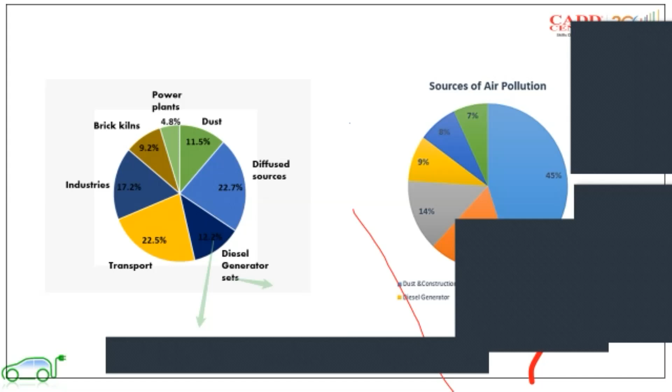Now, if I consider three things: the transport sector. First thing is pollution. What is the second thing? Second thing, most important, is consumption of oil. Global consumption of oil, if I consider it globally, it's huge.

If we consider these kinds of things, transport is providing more than 50% utilization, meaning oil consumption is too much. If we are able to reduce that 50% to, let's say, 10% at least, there will be a huge impact on global oil consumption. And everyone knows oil is not something that will last for your lifetime, there are some limitations to it.

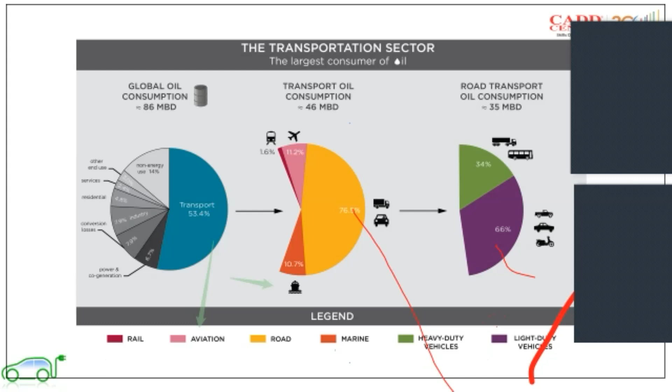What we are going to learn in this webinar is something related to electric vehicles. Everyone here is an electrical engineer or mechanical engineer. We are all going to learn these things and implement them to reduce pollution, and to reduce worldwide oil consumption.

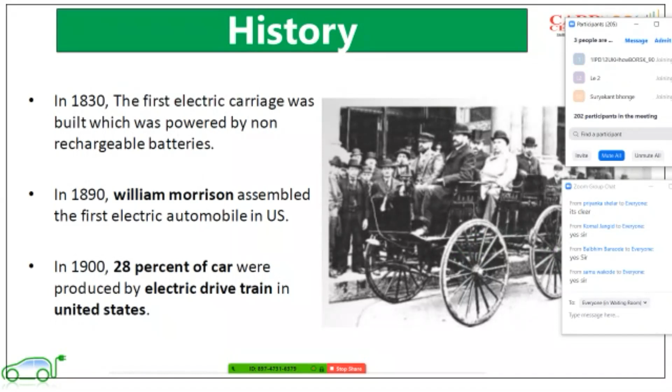Now let's move towards the history. So it's not a new concept - electric vehicle started in the 1830s, but it couldn't progress further because of only one reason: those vehicles were powered by non-rechargeable batteries, and everyone knows that a non-rechargeable battery is not going to work for long. If I want to go, let's say, 100 kilometers, and that battery is capable of providing me 100 kilometers range, then after that there is no option, because that battery is non-rechargeable.

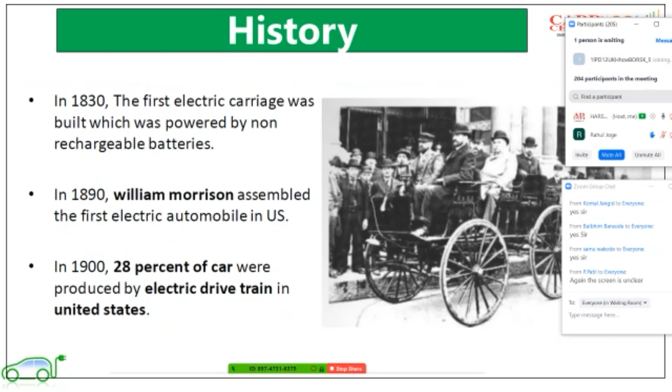That is the only reason despite starting in the 1830s, it hasn't reached here yet. Now in 1900, 28% of the cars were already converted into electric drivetrain in the US. All normal vehicles were converted into electric vehicles in 1900, that's 28% of cars, a huge number. But because of some reasons, which we'll discuss further, all these things couldn't continue.

There is one reason that it's not a new concept, and the 100 kilometer per hour speed record was already achieved with the help of an electric vehicle in 1899. From this you can get an idea that it's not a new concept, it's a very old concept.

But right now we are working on all these things because of only one reason: we know the future of electric vehicles. Therefore we are investing our time and money in learning about electric vehicles.

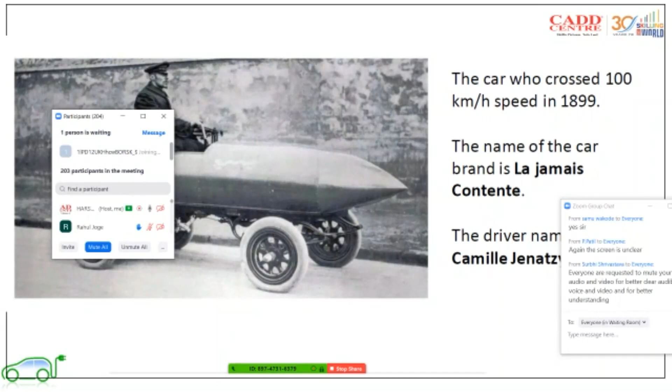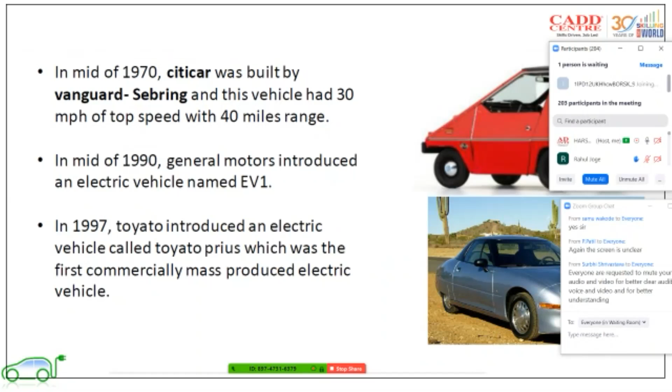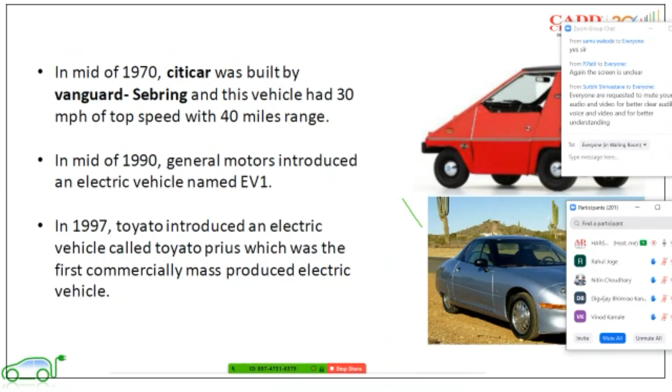And after that, the most important one, the Toyota Prius. It's still working right now, and Toyota Prius is one of the brands we are going to learn about in the future. It was introduced to the world in 1997.

Okay, now it's okay, I don't think so right now. Is there any issue with my screen?

Okay, so after that, the most important thing that changed the viewpoint of electric vehicles is Tesla, the Tesla Roadster. The mindset of every person related to electric vehicles changed because of only one reason, the Tesla Roadster in 2008. Elon Musk's Tesla introduced that electric vehicle, their first electric vehicle in 2008, the Tesla Roadster.

The history behind this car is very different. They started with a certain budget, let's say 50 rupees, but they ended up making that vehicle for 100 rupees. If I consider that simple example, it means they spent double the money. If their budget was 1 lakh rupees, they spent 2 lakh rupees. But after that, they worked on their battery, they worked on the overall design of the electric vehicle.

And right now, we can say one of the greatest names in electric vehicles is... okay, just give me a second, I think there is some disturbance. Sorry, just give me a second.

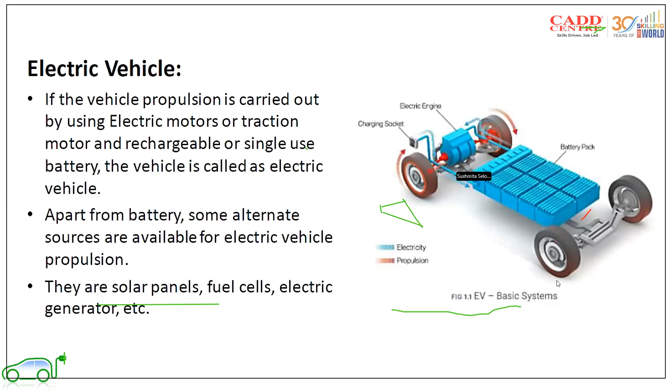Okay, so now let's start. So we have seen the history. So what is meant by electric vehicle? Everyone knows one thing: if I'm considering a normal IC engine or petrol vehicle, what are the main components of that vehicle? If I consider a petrol vehicle, to drive it we need one thing, that is the IC engine, and that IC engine propels the overall vehicle.

So here you can see, there is one IC engine, there will be a fuel tank, and the propulsion system happens only because of the IC engine. If I replace that IC engine with a motor, this is the EV structure.

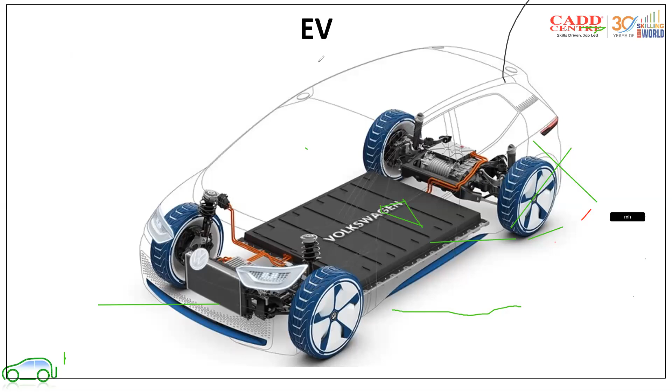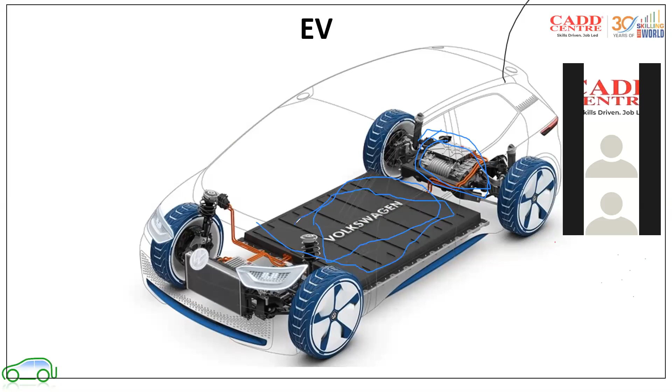Now see, this is the battery, this is the battery pack. We will learn how to develop an electric vehicle or battery after these 6 days of webinar. This kind of battery we are going to use, and how to develop it we will learn. Don't worry about that. I can guarantee one thing: the space requirement for the electric vehicle—if we consider the front area, it's totally empty because of only one reason. We don't require the IC engine. We are using a motor, and the motor is already fitted over here. So that is one of the biggest advantages.

Now, why is electric vehicle needed? What are the advantages of electric vehicle? Everyone has some idea why we are using electric vehicle. There are so many advantages, so we will do a brief comparison between a normal IC engine vehicle, meaning petrol vehicle, and electric vehicle.

As you can see, there are 4 to 5 differences between electric vehicle and IC engine. If we consider a gasoline or petrol vehicle, there will be greenhouse gases, and there will be no pollution in the electric vehicle.

Second thing is range. Range is one of the things which is lacking in the electric vehicle. But how much exactly is the range of any electric vehicle? What factors do we need to consider when calculating the range of an electric vehicle, or the time required to charge it? Can anyone guess how much time it requires to charge an electric vehicle? We will learn this topic day after tomorrow, but right now tell me, how many of you have an idea how much time it takes?

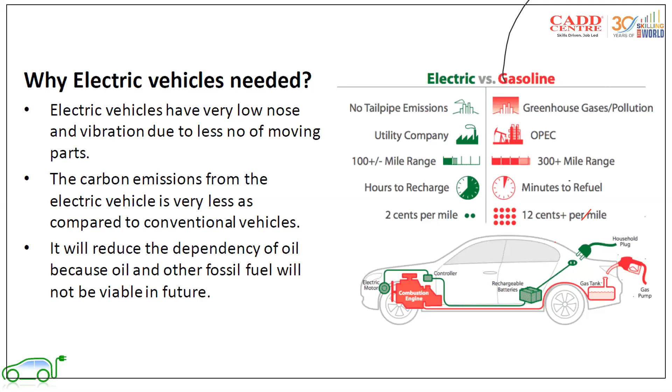Now let's move to the next point. If we see the benefits of electric vehicle, we are just focusing on the positive side. What are the things which are going to help you build that electric vehicle? Why are we focusing on electric vehicle? First thing: it's very energy efficient. If I am using a battery, the output I get will be very good. Second thing: there will be no carbon emission, almost negligible, because we are using pure batteries. Third thing: fuel cost is comparatively very less, and I am going to do calculations—I will share a comparison between Mahindra E2O and a normal petrol vehicle.

You will see the drive comparison—let's say you are going to travel 10 kilometers or 20 kilometers. If you compare the cost of an electric vehicle and a petrol vehicle, both will be very different. We will discuss all of this. Now, the drive system is very simple. We will learn about the propulsion system, and you will be very sure why I say the driving system is simpler. So these are some of the benefits.

Regenerative braking is not practically possible in a normal vehicle—well, it is possible, but we need to add many additional circuits to make it happen. That's why we focus on electric vehicles. Now, what are the challenges of electric vehicle? Definitely there are many challenges we face. The most important is the time required to charge. How much exactly—that will vary, but definitely it requires more time to charge the electric vehicle.

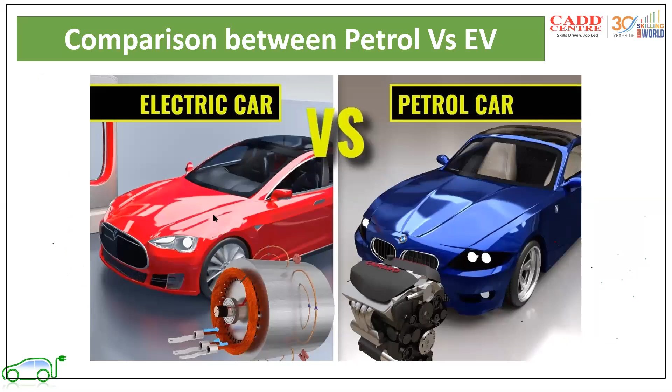Now let's see the exact comparison between petrol vehicle and electric vehicle. What are the key points we need to consider when comparing an electric vehicle and a petrol vehicle? The first important comparison is what is required to propel the system. If I talk about a petrol vehicle, we need an IC engine which is driven by petrol as fuel. And if I consider an electric car, we will require an electric motor. In the IC engine there will be more than 200 moving parts.

200 moving parts. And if I consider a normal electric vehicle, there are less than half as many moving parts available in electric cars. The motors we use will be very easy to construct - first thing, very easy to use. Second thing, third is due to fewer mechanical or moving parts, there will be less losses. If losses are less, then definitely at the end I will get more efficiency. If I consider a petrol vehicle, definitely there will be more losses. This is the first comparison.

Now the second comparison is no pollution. We have already learned the impact of air pollution or oil consumption on the environment. For that reason alone we have chosen electric vehicles. Therefore, there is no pollution from electric vehicles, while petrol vehicles contribute more to pollution. When we use a petrol vehicle, definitely there will be more pollution.

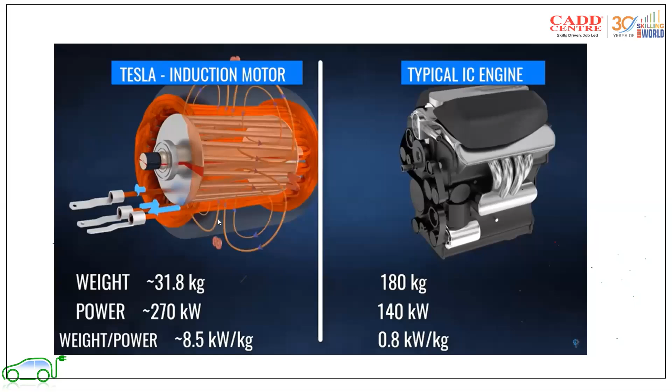Now the next point, the cost of travel. Now this is the most interesting thing. I was also surprised when I saw all these things. There might be chances, to be very honest, I want myself to be very transparent.

There might be chances that after hand calculation, the normal calculations right now, of what electric vehicles are present in the field right now, in India or all over the world, consider it as an average thing. 0.03 per mile if I consider electric vehicle. If I consider IC engine, that is 0.1 per mile. This is the biggest difference, and here is the proof of all these things.

I have taken an electric car, the Mahindra E2O Plus, and a petrol car. Mileage is different, but these are all things I can understand. There are some drawbacks and some advantages of all these things, but at the end, we must focus on only one thing, that is 0.73 paisa cost per kilometer.

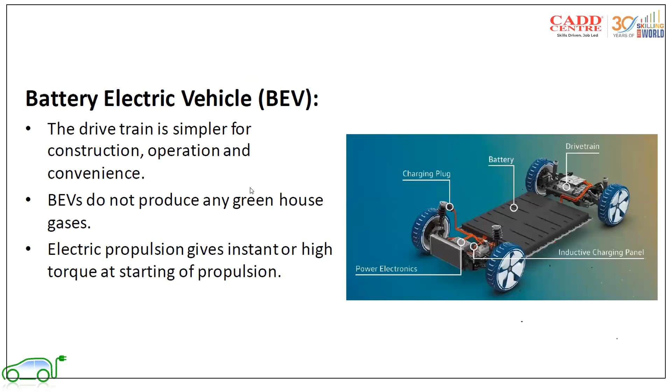If I am considering a battery electric vehicle, the first thing is the Mahindra E2O.

Everyone is facing the sound problem. Type yes if you are, type no if you are not. No, no, okay, I think it's fine on your side. Okay, thank you so much.

So the first vehicle is Mahindra E2O. Everyone must have seen this vehicle. All of you here must have seen that green colored Ola. Same, it's the same car which is working as an electric vehicle.

Now if we consider government focus, the main reason behind converting all the rickshaws to e-rickshaws is that electric vehicles and e-rickshaws are things which are going to be used on a daily basis, so therefore they are focusing on all these things.

So this is one of the factors, the Mahindra E2O, which is also a battery electric vehicle. Take a screenshot, take notes of all these things. I will definitely provide all the PPTs, but as a student and as a trainer, I know that if we have something and ignore it, we forget it. So I want everyone to please note down all these things.

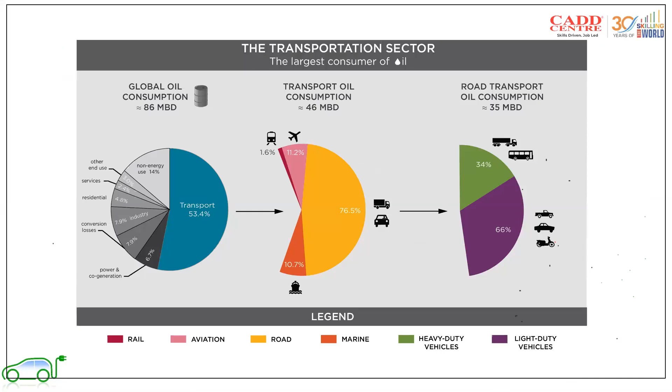So we have seen some statistics why we are using electric vehicle. Two things we have seen: first is less oil consumption, second is pollution. We have seen the market of Indian market, international market, what will be the future. I have one separate session on electric vehicle future. Last day will be totally dedicated to that session, where I will share business opportunities and future trends related to electric vehicle.

So don't worry about that, I will definitely share the PPTs and everything. China is one of the countries which is using more electric vehicle, but not purchasing more if I compare. Dheeraj sir, definitely we are going to share all these PPTs and everything.

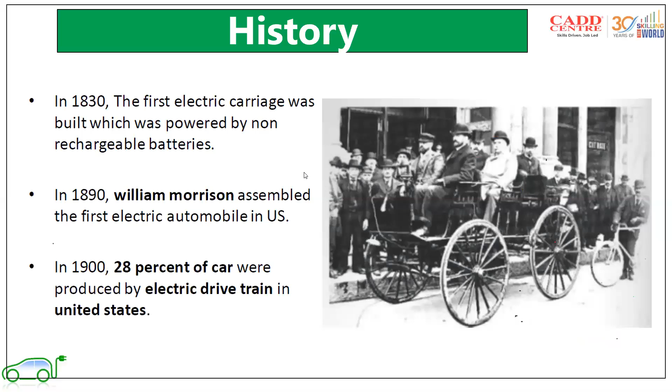If I consider history, 1830 was the first electric vehicle, and eventually it grew. Right now we are also working on electric vehicle. The EV1 was launched in the 1990s by General Motors, and Tesla is working right now, along with a number of companies.

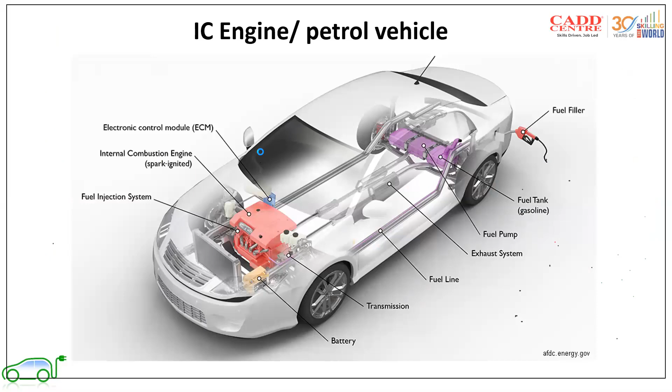We have seen the comparison between IC engine and electric vehicle, and why we need electric vehicle - we have already discussed all these things. Benefits of electric vehicle: efficiency is more, carbon emission will be very low, propulsion fuel cost is very less, drive system is very easy, and regenerative braking is one of the advantages.

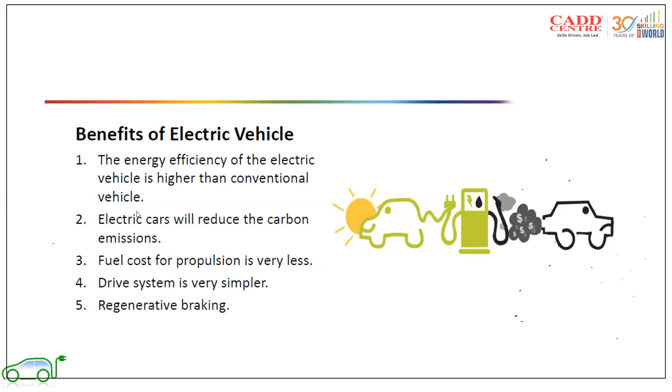Now some challenges of electric vehicles that we have already seen: the range is one problem, second is refueling time, and cost is another problem. But I'm 100%, 200% sure after this session you will be very clear why the range issue is not the issue, why the refueling time is not the issue, and why the cost of electric vehicle is not the issue. We will discuss all these things.

Now second thing, environmental impact - we have already seen what is the environmental impact if you use the electric vehicle. So this is not the truth, because we are going to use all the renewable sources to drive all the electric vehicles. I know there is some voice issue, but it's okay - we have already seen why we are using renewable energy sources.

I read one study related to electric vehicle, and they mention that if we consider any solar power plant, the biggest power plant in India, it is very easy to fulfill all the requirement of the 2022 or 2023 upcoming vehicles. So it's not a big issue.

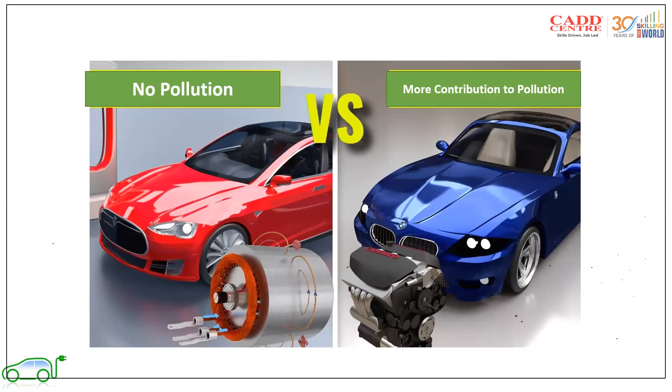So we have seen the comparison - petrol cars with cost and weight, weight to power ratio, we have already seen. We have seen the comparison of cost per kilometer for electric vehicle and petrol cars. Next thing is the types of electric vehicle.

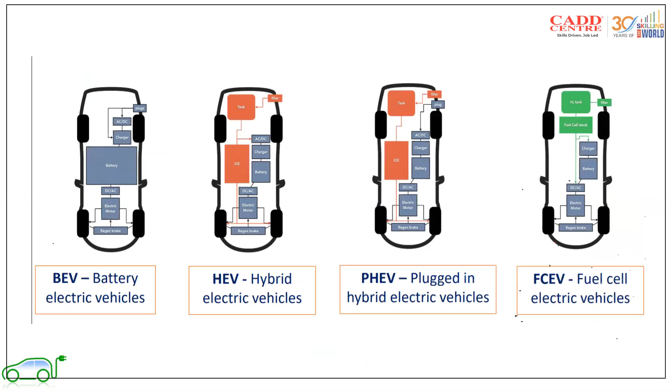First is battery electric vehicle, second is hybrid electric vehicle, third is plug-in hybrid electric vehicle, fourth is fuel cell electric vehicle. Battery electric vehicle is only focusing on battery as the primary source of this vehicle.

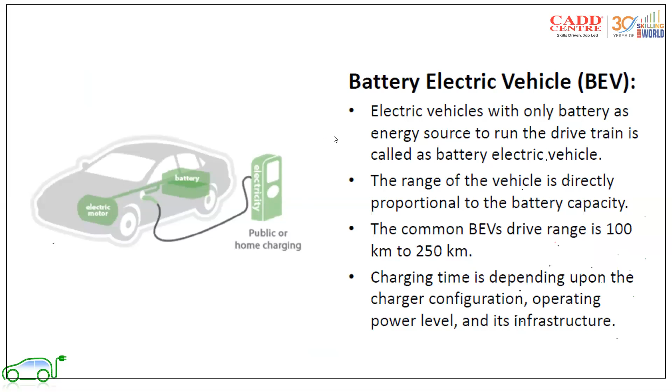The second thing is types of fuel, meaning what are the battery electric vehicles. First is Tata Motors - Tata Nexon, Mahindra e2o, MG ZS, Hyundai, Tesla, Tesla S, Tesla X, and Roadster. There are so many examples.

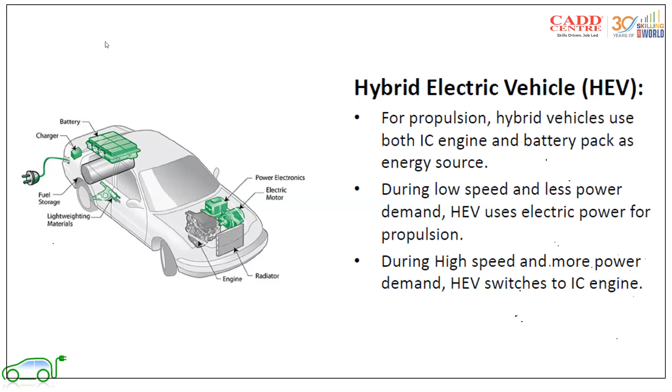Now next thing is hybrid electric vehicle, where we have two types of fuel: first is IC engine, second is battery. Either we are using electric vehicle meaning battery, or IC engine. For high speed, high torque, we use IC engine. For low speed, low torque, we use battery. The best example of this is Toyota Prius. The second option is plug-in hybrid electric vehicle.

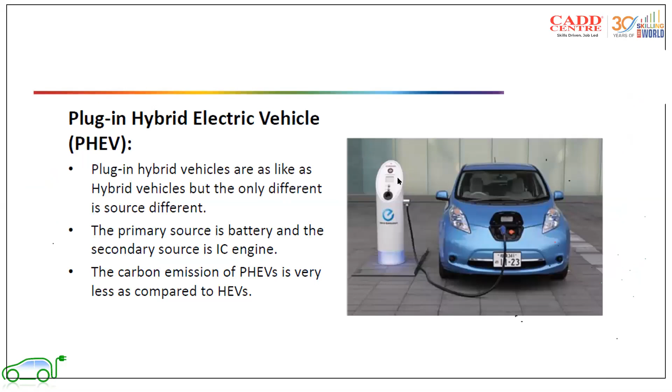In that plugged-in hybrid electric vehicle, we will provide one separate slot to charge the battery. Primary source will be battery, secondary will be our IC engine. The range is very good, but if we are using this combination, there will be little bit carbon emission, meaning it will definitely cause some air pollution compared to a normal battery electric vehicle.

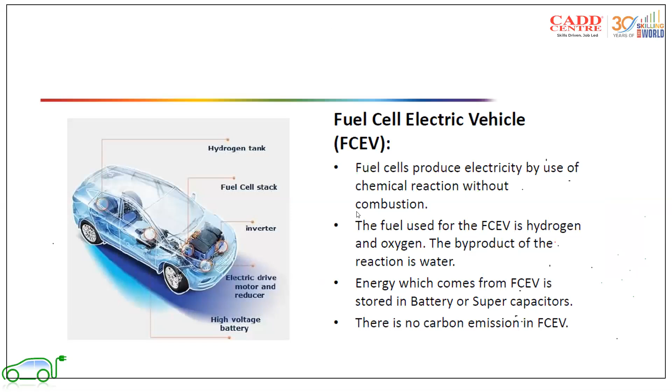So we have seen the types of plugged-in hybrid electric vehicle, that is Toyota Prius, BMW i8, Honda Accord. These are some types. Then the last thing is fuel cell electric vehicle. So these are some types of electric vehicle. Now we have seen the types and everything.

Now when it comes to electric vehicle, if I want to build or design something, everyone must have learned about the drafting system, that is electrical engineering graphics or engineering drawing, ED or EG subject, in first year of engineering or polytechnic. We have seen there, if you want to build or manufacture one bottle, we need to do three things: side view, front view, top view, these kinds of things.

Or if you want to develop or design any circuit, we need to consider something, we need to find out the components, what are the major components, what will be the values, what will be the specification of that particular system. So we need to consider all these things. So for electric vehicle architecture, what are the main components, what are the main key areas, what are the main factors by which you can develop an electric vehicle?

As I have already told you, we have 12 modules of electric vehicle. This one I am telling you now is one of the first modules where you are given total information related to electric vehicle, what are the types and everything, what is propulsion system. These are always some theoretical parts. When it comes to deep calculations or exactly creating an electric vehicle, it's a huge topic. If you go through any online courses, you will see it will take 6 to 7 months to learn all these things, to design one electric vehicle.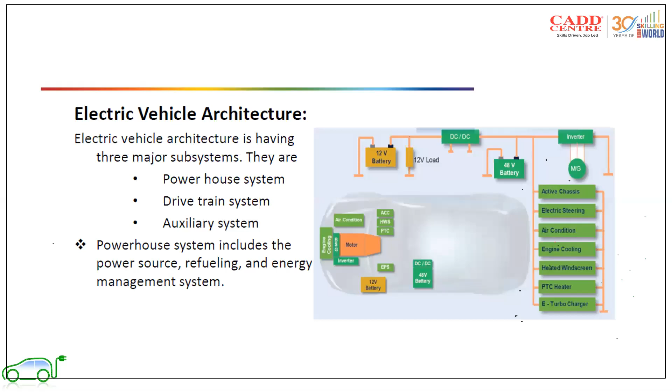A driverless vehicle is a good example of an electric vehicle, and this is also included - the whole automatic system will already be covered into the auxiliary system. So these are the three things on which the whole electric vehicle is based. These three things are such that they build an electric vehicle.

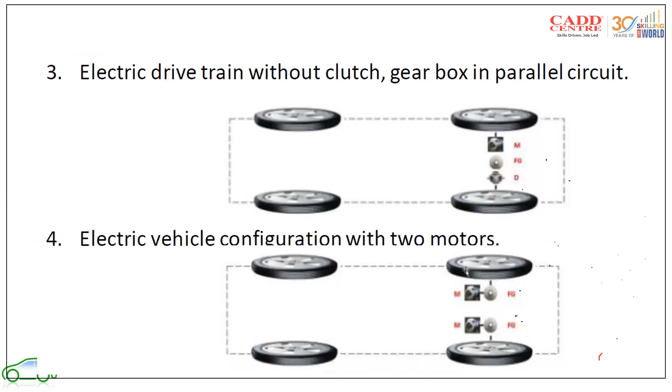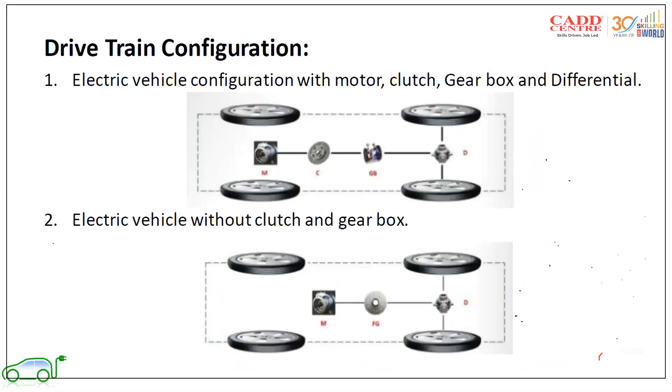For a question - any participant? Any questions? You can ask me any questions. Okay, what is exactly auxiliary system?